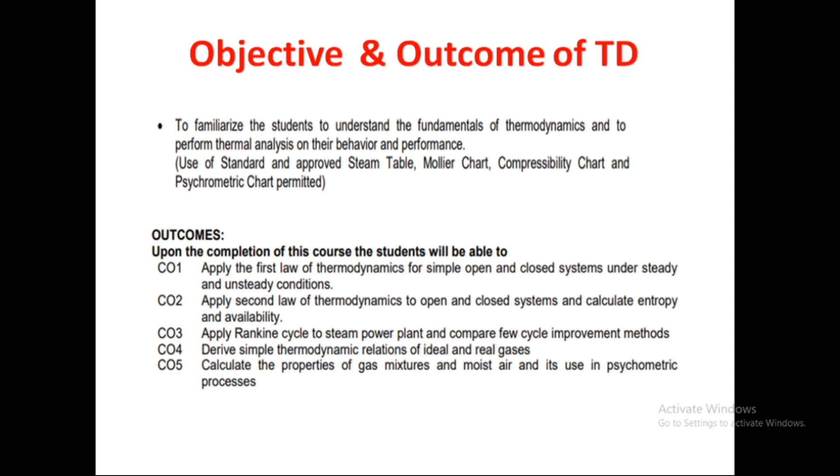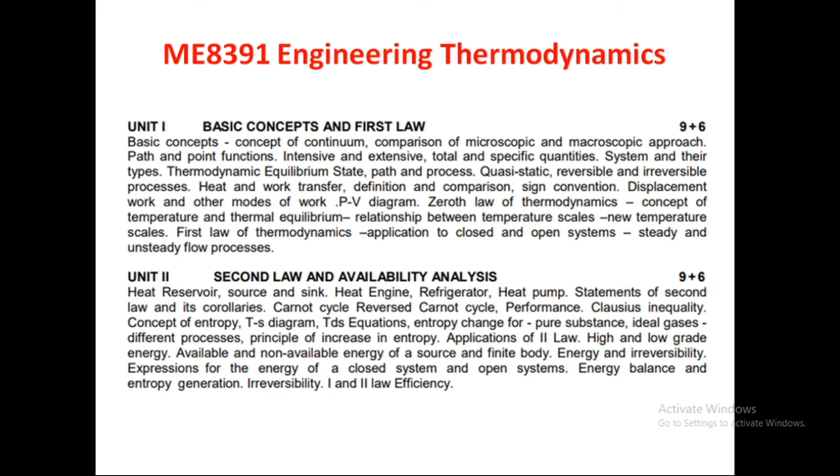So the first unit covers basic concepts and the first law of thermodynamics. So this is the syllabus. We will go one by one during our forthcoming lectures. This is the third unit, properties of pure substance and steam power cycle. The fourth unit comprises ideal and real gases and thermodynamic relationships. The fifth unit consists of gas mixtures and psychrometry.

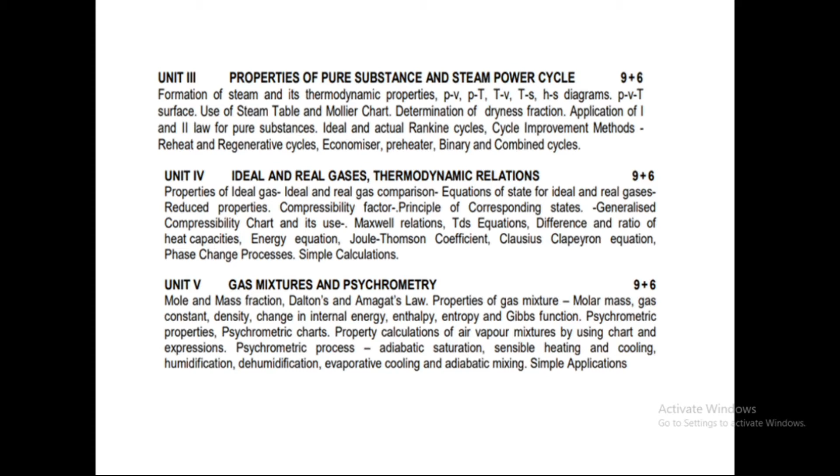So there are good books available to refer. A few textbooks referred by Anna University are Rajput, A Textbook of Engineering Thermodynamics, and also Cengel, Thermodynamics: An Engineering Approach. The Cengel book has a lot of application-oriented concepts, and they explain in detail what is fundamental and how it is applicable to engineering applications. And also P.K. Nag is a very good book; one can refer to that book also. So these are the textbooks as well as reference books for this particular subject.

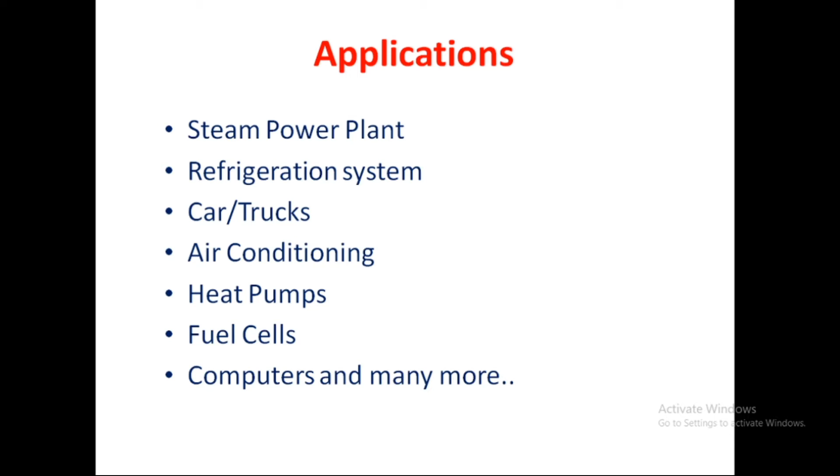So mainly applications. If you take thermodynamics, mostly in steam power plants, refrigeration systems, air conditioning systems, cars, trucks and buses in transport systems, heat pumps, fuel cells, even computers, and many more. There are a lot of applications where heat, work and energy are involved. You can apply these thermodynamic fundamental relationships and applications.

So what is thermodynamics? Therm and dynamics. Therm means heat; it is a Greek word. Dynamic means force or power, which is most descriptive of the early efforts to convert heat into power. It is the science which deals with the relationship between heat and work and subsequent characteristics of systems in an equilibrium state. It is the science of energy and energy transformation. Whatever may be, you can define.

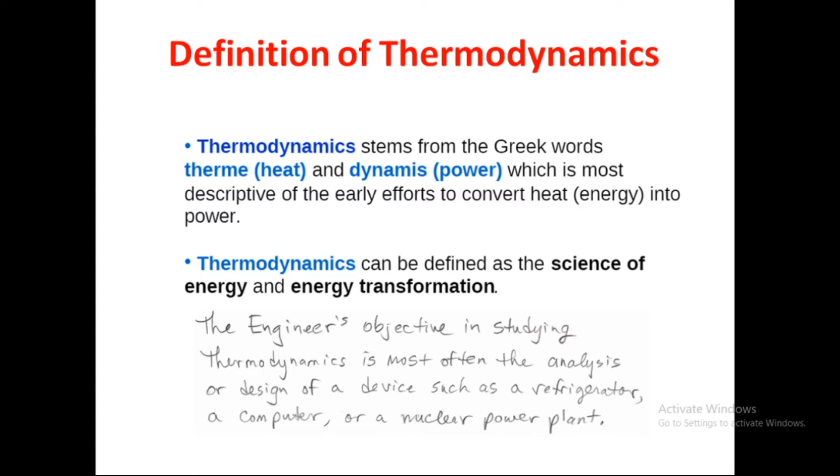The engineer's objective in studying thermodynamics is most often the analysis or design of devices such as refrigerators, computers, nuclear power plants, and many more. So simply, as I already told you, therm means heat or warm. It is a Greek word. Dynamics means force or power. This force is related to motion also. The motion of the atoms will create the heat. What is temperature? Hotness, or the measurement of heat, is nothing but temperature.

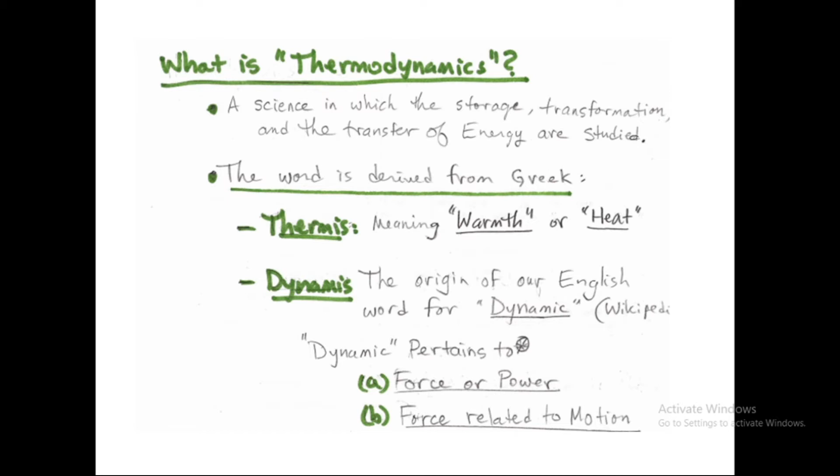So this is the definition of thermodynamics. It's a science which deals with the relationship among heat, work and properties of the system which can be in equilibrium, and it describes the system and changes in the physical properties of the system. What is a property? We'll see properties one by one in upcoming slides. Here property means it may be pressure, it may be temperature, it may be volume.

If you take ice in the solid state at 0 degrees Celsius, it has some properties, that is pressure 1, temperature 1 and volume 1. If you heat the solid ice, it will melt. It will reach 100 degrees Celsius. The complete ice will be converted into water, the liquid state. So here the pressure, temperature and volume will be changed. This is property state 1, state 2.

Then again, if you heat beyond 100 degrees Celsius, the liquid, that is the water, gets vaporized. So again it changes state, and there also the properties will be changed. The pressure, temperature and volume will be changed. So this relationship is the best example for thermodynamics.

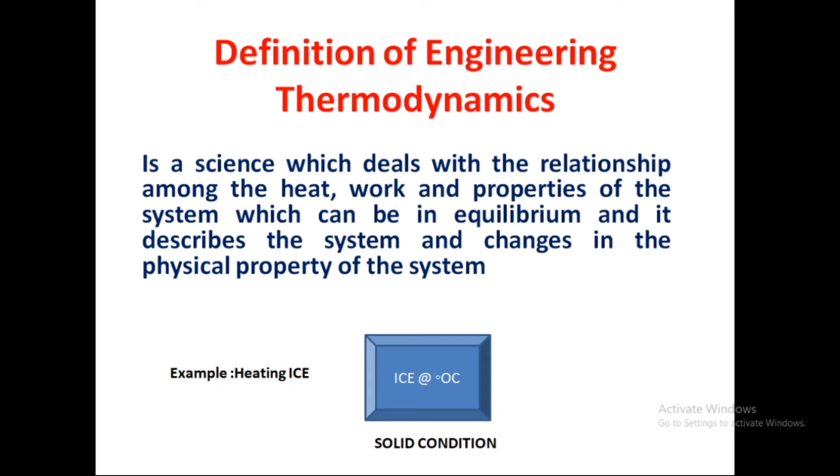Then we are coming to system, surrounding and boundary. What is system? Simple meaning is finite quantity of matter or prescribed region of space.

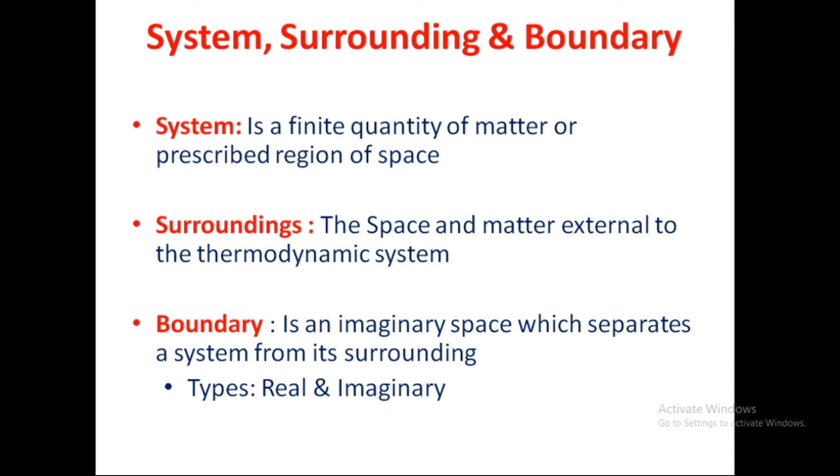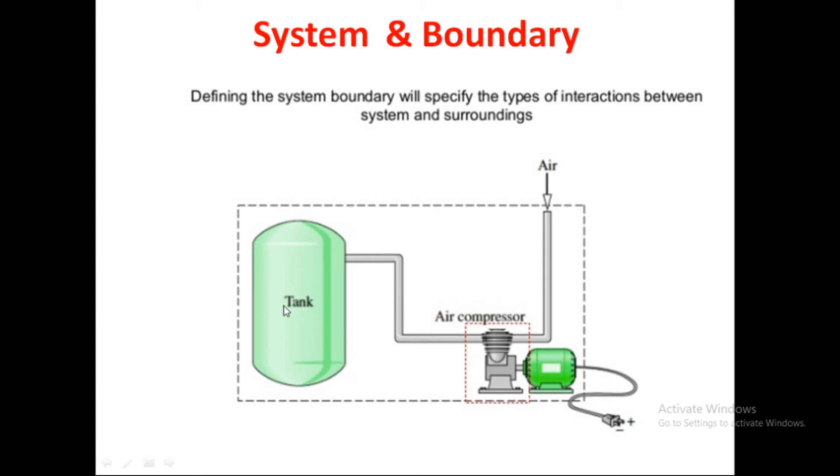So best example here: defining the system boundary will specify the interaction between system and surroundings. This is called a system. It comprises of tank, air compressor, those things. This air is coming from atmosphere, so it interacts with the system; some mass interaction is taking place. So this closed confined region is called system, this is called surrounding. This imaginary surface is called boundary. It's also called control surface. This portion is also called control volume.

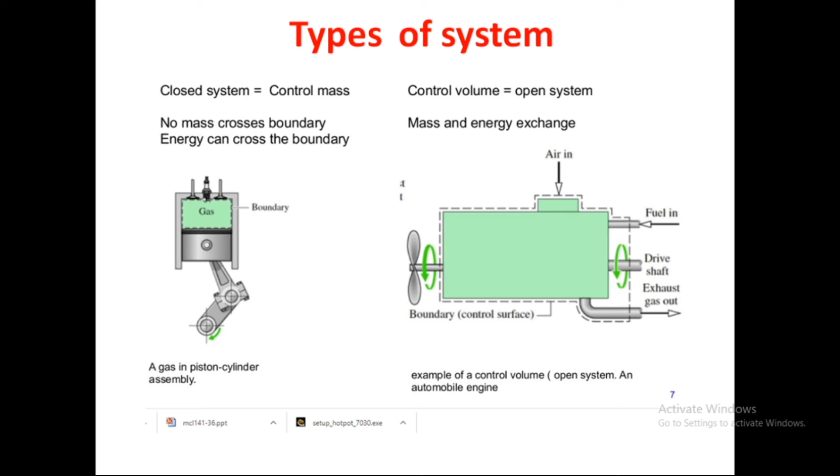Then what about closed system? There's no mass transfer, only energy can cross the boundary. So the same piston cylinder arrangement, if both walls are closed, then only energy can cross the boundary. So that system is called closed system. Then one more is isolated system. If you keep hot coffee in a thermal flask, there is no transfer of mass or energy. Neither mass nor energy. That system is called isolated system. The entire universe is called an isolated system. So these are the three types of systems: open system, closed system, isolated system. You can get questions like what is system, what are the types of system, in 2 marks.

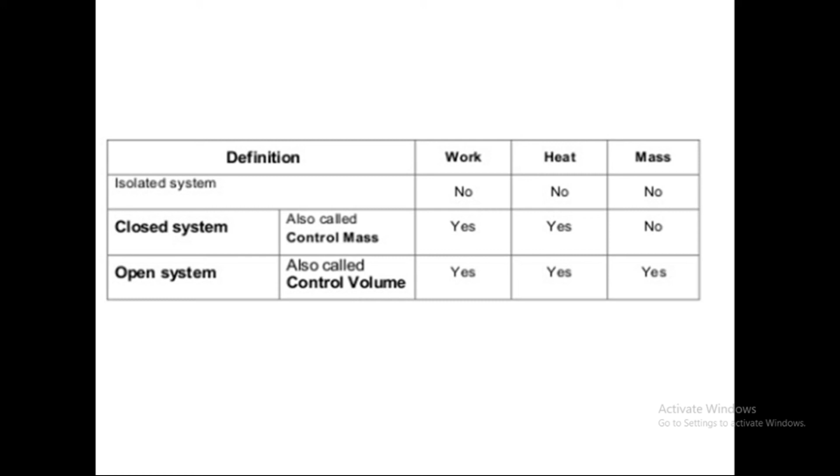So whatever I told you, the same thing we tabulated. Open system is a control volume. Here work transfer is taking place, heat transfer is taking place, mass also transfers. In case of closed system, only work and heat, that is energy, will be transferred, no mass transfer. In case of isolated system, no mass, no heat, no work can be exchanged between the system and surroundings.

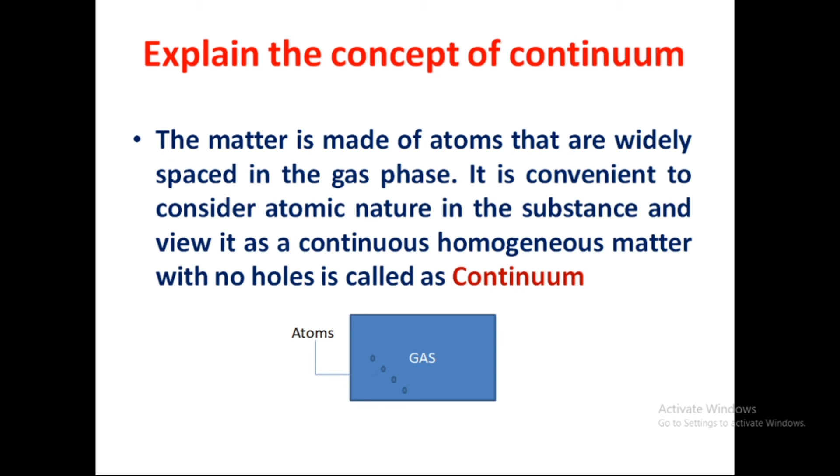So then we will move into macroscopic and microscopic approach. What is macroscopic approach? If you consider large scale properties, taking the whole consisting of all atoms as a whole, that is called macroscopic approach. It is also called classical approach. That thermodynamics is called classical thermodynamics. It requires fewer variables to define this particular approach.

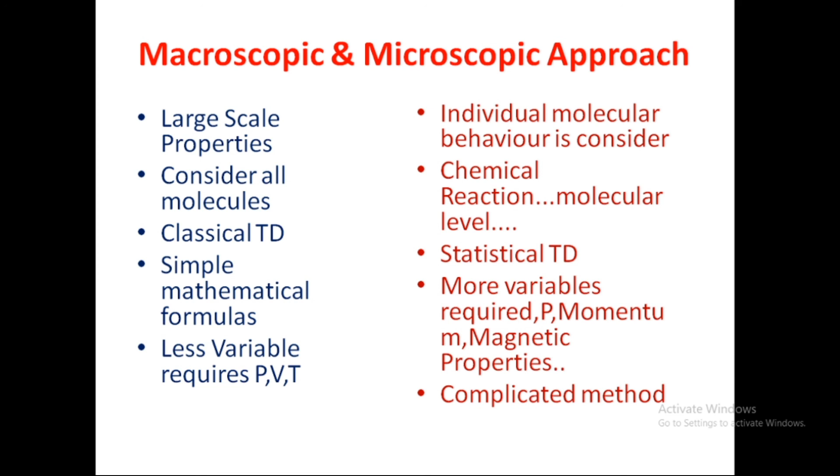In case of microscopic approach, you study molecular level behavior. Best example is chemical reactions. If you have some chemical formula with respect to atoms, that is molecular level. It is also called statistical approach, and statistical thermodynamics. Here to define this, you need more variables, even pressure, momentum, magnetic flux transfer, those things are very important. It is a complicated one. But in thermodynamic systems, we are going to use only the macroscopic approach. These are the two main classifications, macroscopic and microscopic approach.

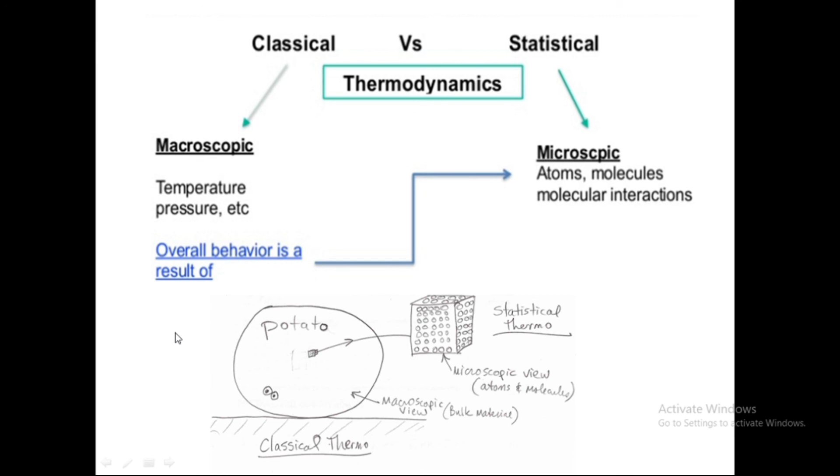So best example, from this diagram, this is a potato having lots of atoms. This is a bulk material. If you consider individual few molecules, it is called statistical approach: microscopic, atoms and molecules and molecular interaction. But in macroscopic, we consider the bulk material, the entire potato's temperature, what will be the pressure. That is called classical thermodynamics. Clear?